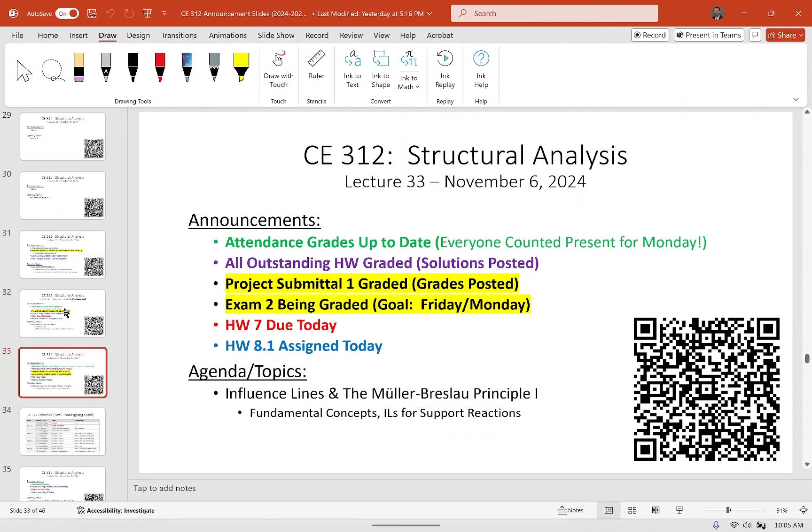I don't know if I showed you all this last time, so if I did, again my apologies. I'll pull the QR code up again, but I want to talk about this. This is our schedule until Thanksgiving break, okay?

Just a couple housekeeping items. So we're currently in week 12. What did we do last week? Last week we had the exam on Monday, we canceled class on Wednesday, and then we did our first MASTAN lecture on Friday, and then this was the pre-recorded lecture we did last time, okay?

So today we're starting our topic on the theory of influence lines. We're going to have 5 lectures on influence lines that go through how to construct them and then how to use them. And then we go through our last topic of the semester, which is matrix analysis.

The way matrix analysis is going to work is we're going to have 2 lectures in week 14, Monday and Wednesday. I'm going to assign a homework, it's going to be due after break, but not until Wednesday after break. So it's not going to be due on Monday when you return.

What we're going to do on Friday of Thanksgiving break is have a project troubleshooting day. Here's my point: if the project's done, you don't have to come, okay? I'm just going to be here in case you want to come and ask questions about the project. I'm not taking attendance that day, you can come or not, okay? The link to submit project submittal 2 is open on Blackboard, okay?

And for that submission, I need 3 things. I need the AutoCAD drawing of your final truss with all the members and all that — I have an example on Blackboard for what it should look like. I want your Excel calculations, or your calculations however you choose to do them, neatly formatted. Then I want your MASTAN file.

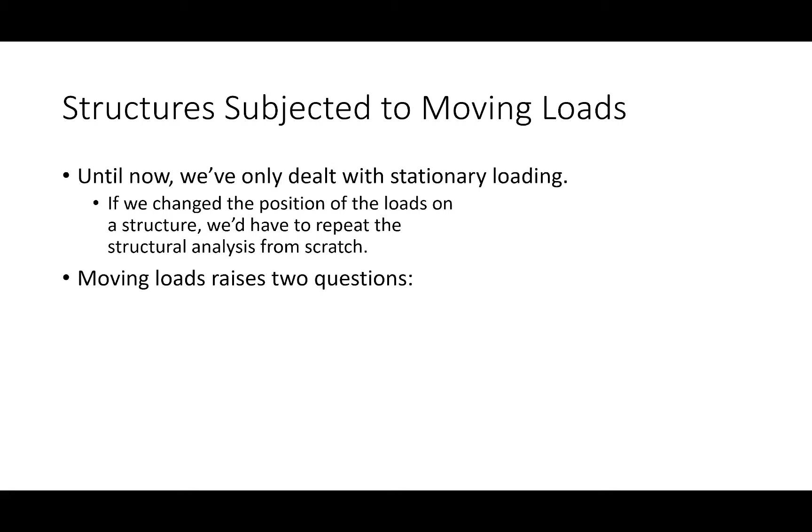Moving loads, or dealing with structures with moving loads, does raise two inquiries we kind of need to address. The first question is: is there a tool that we can develop to analyze a structure subjected to moving loads? And why would we want to do that?

A bridge, right? Bridges are structures with moving loads on them. The vehicular loads move across the structure. So we need to be able to handle not just a structural analysis due to loads at one position, but an analysis that results in an envelope of responses due to the loads at any position. Does that make sense, that idea?

So that's the first question. But then, okay, we have this tool—can we use this tool to do the structural analysis for us? In other words, can this tool tell us where to put the loads to generate the worst case scenario load placement? Can we get that answer directly with the influence line? And the answer is yes. That tool is called an influence line.

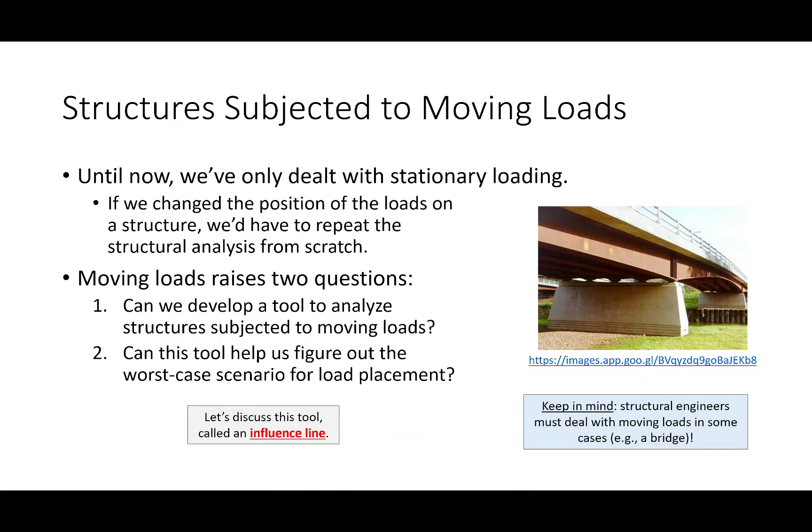I want to explain what an influence line is, and then we're going to go through several examples on how to construct one. So what is an influence line? No surprise there, it is a diagram used to assess a structure subjected to loads that move. So here's how it works.

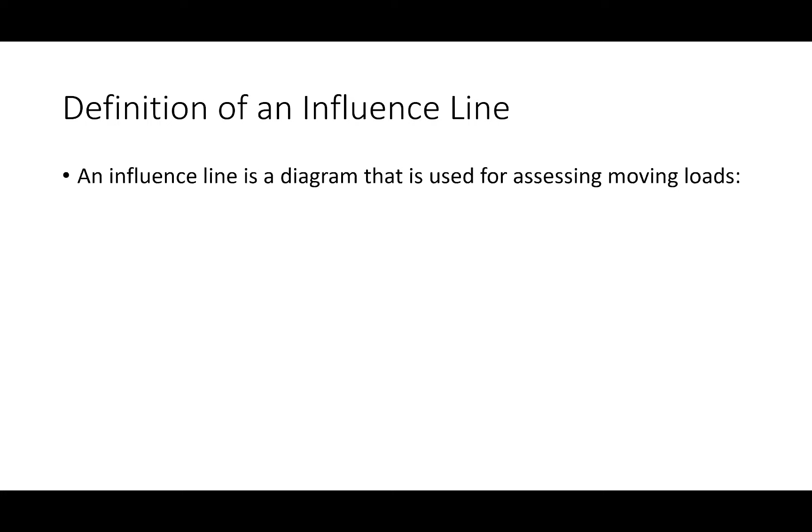What you do is you take your structure and pick a point on the structure that you're interested in. That point could be any number of things—it could be the reaction at A, it could be the shear right here, or the moment right here. For example, if I have a beam, I have a support here and a support here, I'm going to have a reaction there and a reaction there.

So I could say I'm going to draw an influence line for a response of interest. It could be this reaction, it could be this reaction, it could be what is the shear if I samurai sword right here, what is the moment if I samurai sword right there. So I have to pick a point of interest, okay?

And then what I do is take that structure and take a single unit load—we'll say a single unit load of 1. You can think of it as like 1 kip, but really it's just a unitless 1. We take it and move it across the structure, and as we move it across the structure, we keep our eye fixed on that response of interest, that point of interest, and record the response as the load moves. So on the x-axis we put the position of the load, and on the y-axis we put whatever response we're looking at. That plot is an influence line.

This basic definition, I want you to keep in the back of your head, because it will help serve as a gut check to ensure that what we're doing and the graphical approach we use still works, okay?

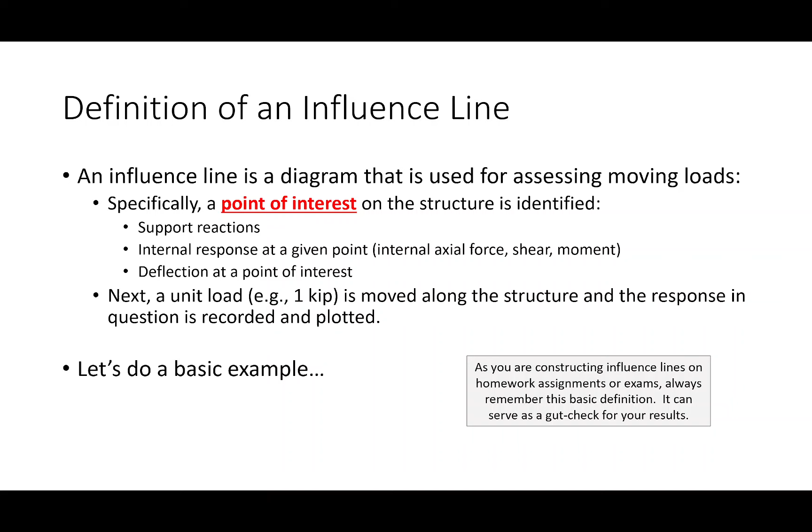So let's do a basic example. We're going to do this one on the board a little bit. I've got some of this on the slide, but let's do this on the board. Let me clean up what I've got here, and let's see if we can walk ourselves through this. This is the simplest influence line example that I can think of.

So I have a simply supported beam. We're going to say that this structure is 80 foot long. It's going to have a reaction here and a reaction here. It's also going to have a horizontal reaction, but for the purposes of influence lines, we're primarily dealing with vertical loads. That's one thing I'll mention about influence lines: we primarily deal with vertical loads because the application is for bridges. That's not to say you couldn't theoretically use an influence line for incline loads, but we're talking about traffic moving over a bridge. That's why we primarily discuss that.

We'll call this support A, we'll call this support B, and I want to figure out, let me draw a diagram, the influence line for AY. In other words, I want to figure out what the influence line for AY looks like as we move the load across the structure.

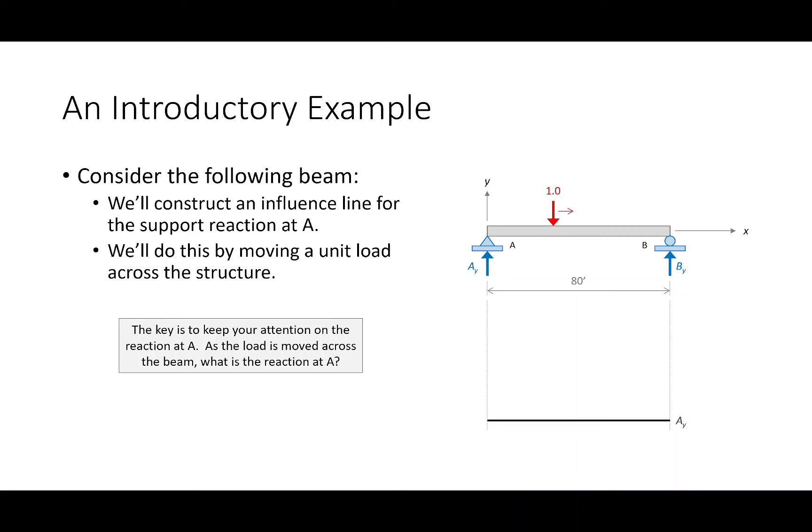Okay, let's do this. Now let's put the load right there. If I put the load there, what's the reaction at A? 1. So this is x equals 0 feet, 1.0, right? So that's going to look something like that. So I propose that the influence line for the reaction at A looks like that. Does that make sense? That's what we get.

So boom, you drew your first influence line. Congratulations. There is a lot packaged into an influence line. It is an incredibly deceptive but incredibly effective tool. It's deceptive how effective it is because it seems super basic. And it is, but what you can get out of this is amazing, and you're going to see this throughout the next few lectures. Let me explain a couple points.

For example, if I had a moving load and I was a geotechnical engineer responsible for designing the foundation under support A, where would I put those loads to generate the worst case response for design? I'd stick them over here, because this is where the highest value on the influence line is. With me so far? Okay, here's another application.

You told me that if I put the load right in the middle, the reaction is a half. Why is the reaction 1/2? I would say because the load is 1. What if I put a 14 kip load in the middle? What would the reaction be at A? 7. Now, how did you do that?

How about a way of doing that as 14 times a half? Here's my point: if you draw an influence line, which is the response due to a load of 1, you can determine the response due to any magnitude of load anywhere. You see what I mean? That's what I'm getting at.

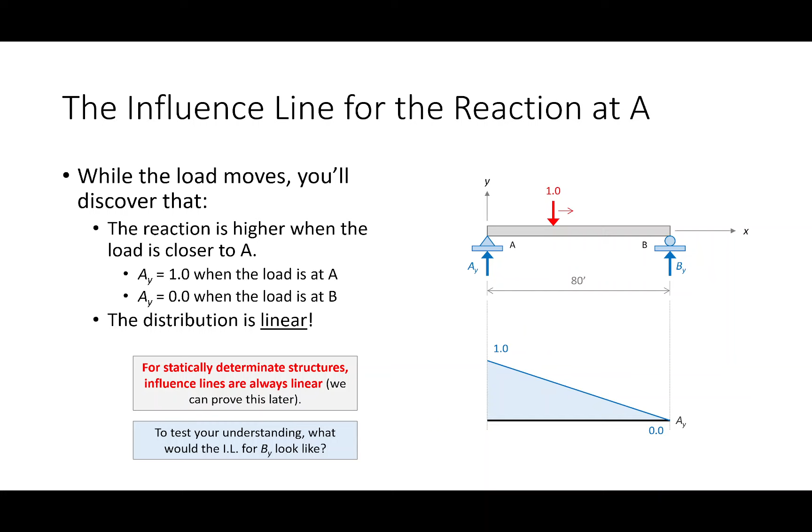Watch this. What is this plus this right here? 1. What about that? 1. 1, 1, 1. Why is that the case? I propose that happens if you draw the influence lines for every reaction in a structure and superimpose them. That will always happen. Why? Because the sum of the forces in the y direction equals 0. I have a 1 going down, so I have to have 1 going up. Does that make sense? There's a lot baked into this. So far, so good?

Okay, now a couple things. This is a fine way of learning how to understand influence lines, but it is really tedious. Remember when we were doing shear and moment diagrams and we said we could just cut sections and plot it, and that would be a pain? We said let's not do that, let's develop a graphical approach, develop some patterns, and then we can draw shear and moment diagrams more effectively. Well, we're going to do that here as well.

Influence lines: so a couple things. Influence lines for statically determinate structures are always linear, always. You're going to understand why here in a bit. For indeterminate structures, that might not be the case, and again you'll understand why here in a bit.

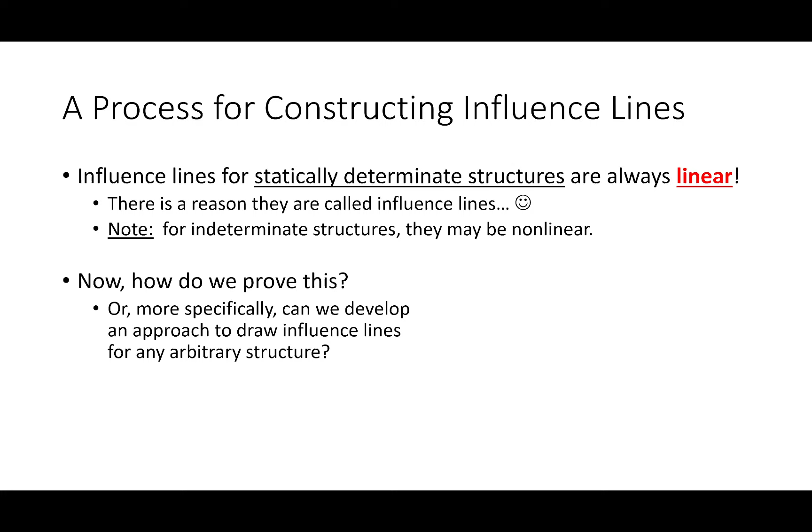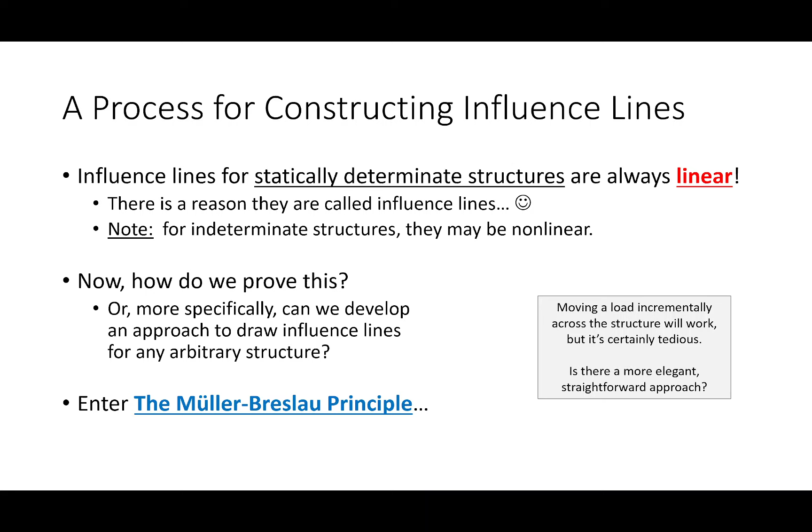Now, how do we prove this? Or maybe, how do we develop this approach to generate arbitrary influence lines? Is there a more straightforward approach? The answer is yes, and the name for this approach is called the Müller-Breslau principle. Now, the Müller-Breslau principle is a mouthful, but once you work it through in your head, you'll see how easy this is. If you were to define the Müller-Breslau principle, this is what it says: the deflected shape of a structure represents, to some scale, the influence line.

Specifically, the influence line for a given force effect, if you take that force effect and move it through a small displacement. I am sure, given that everybody's thinking about non-Newtonian fluids right now, you're going, what? That was a lot. What are you talking about, Dr. Mike? So I'm going to distill this for you in an easy to digest, step by step way.

So here's how an influence line works, and this is how the Müller-Breslau principle works. The first thing you do is, just like over here, you identify a response of interest. What are you drawing the influence line for? Let's say we are drawing the influence line for the reaction at A. Then we take that support reaction and kick it away, we get rid of it. Then we take that structure and move it through a unit displacement, and the resulting deformation is the influence line.

Let me walk it through over here. Okay, can I erase some of this? Okay.

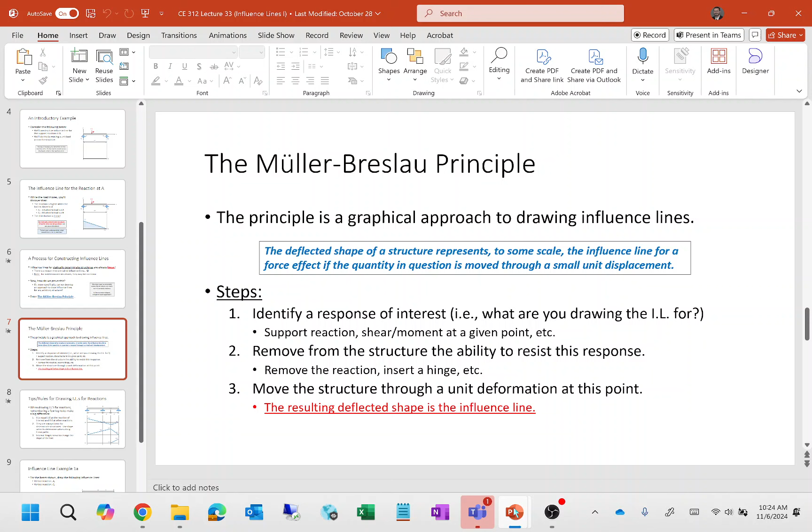So what I'm then going to do is I'm going to pick this point on the structure and move it up, so much so that that displacement is 1. Now if I pick the structure up and move it up 1, what does that look like? Well, it looks like this. So here's the structure, and if I pick that point and move it up, that's what it looks like, right? It just whoop, goes up, right?

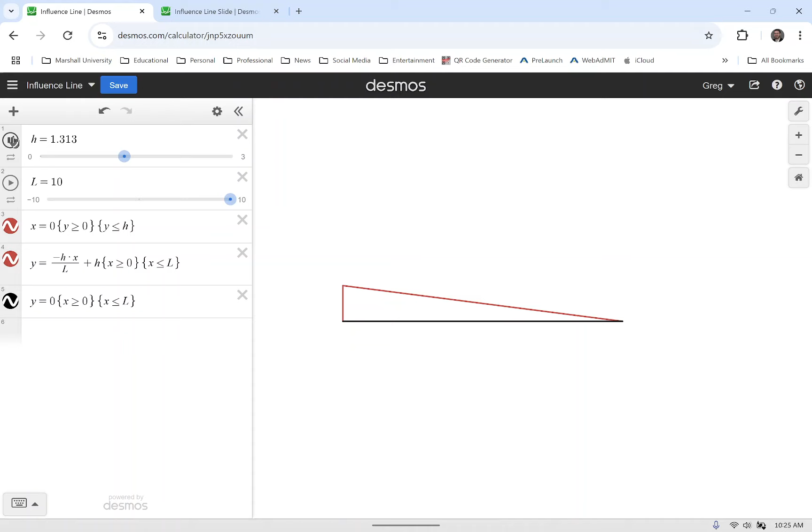Isn't that resulting displaced shape the influence line? Isn't that what it looked like? That's what the Müller-Breslau principle states, and that's the graphical approach that we're going to use, that we just pick the structure up and we deform it. Okay, with me so far?

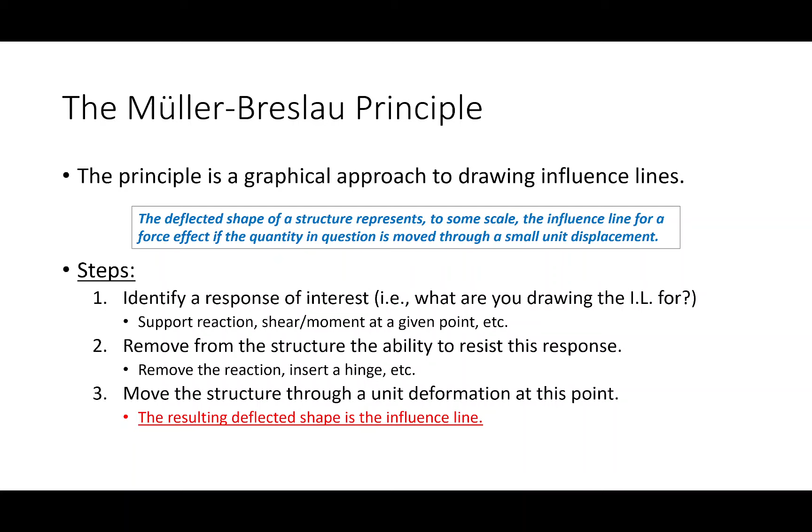We can do this for some really interesting and complicated structures. Okay, so let's take a look at what I've got here on the slide, because I'm gonna go back and show you these here in a bit. But now I have an influence line situation that's a little bit more involved.

Okay, so let's say I'm trying to draw the influence line for the reaction at A. Okay, so let's just take what we know about structural behavior and let's make some common sense observations.

If I put the load at A, what is the reaction at A? The load, which is, in this case, the load is 1, right? So I'm saying that right here, that needs to be 1. Are we okay with that?

If I take the load and put it at B, what is the reaction at A? No, hold on, it's 0, right? If you put the load right here at B, the reaction at B is 1. Here it's 0, right? So this should be

0. What about if I put the load at C? Still 0. In fact, would a general statement about reaction influence lines be that influence lines for reactions should equal 1 at that reaction and 0 at all other reactions? Right? Is that just common sense? Does that make sense? Okay.

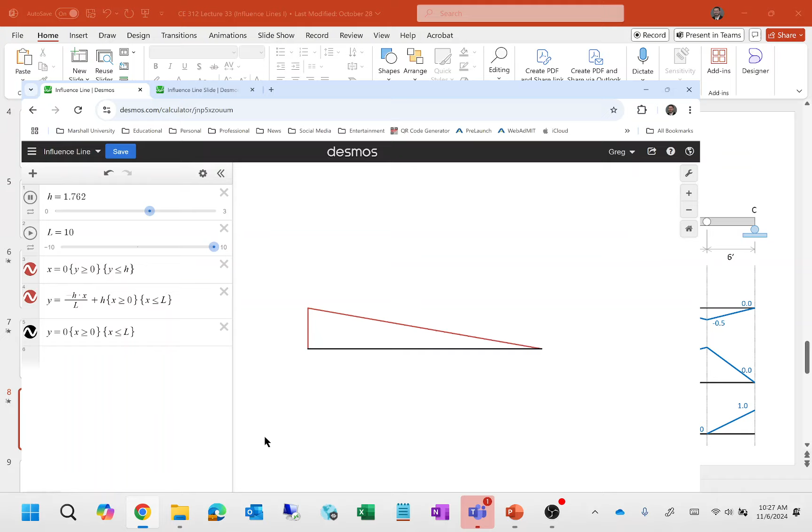You stop. So here's that structure. I don't know how easy that's being visible, but here I've got support A, support B, support C. Okay, if I take support A and lift it up 1, so here's what I'm doing for this structure. Okay, so let's draw this structure out. Okay, so here's the structure.

All right, so I have a support here, support here, support here, and then I have a hinge right there. Okay, there's a hinge right there. What I'm doing is I am removing that support and I'm picking this up 1, right? But I'm not getting rid of this support and I'm not getting rid of this support. So I'm sort of saying the structure from here to

here is going to behave like a seesaw, right? And then this hinge, it's going to do that. So if I look at the structure as it deforms, it does something that's kind of like this, right? The hinge right here is where it sort of like changes direction and it pivots about where the supports are, right? Not only does that make sense kinematically, but it makes sense from a structural response standpoint, right?

The influence line has got to equal 1 here, 0 here, 0 here. And it also has to be linear. The influence lines are lines. Make sense? This is the only way that those facts can be satisfied. Okay, so far so good?

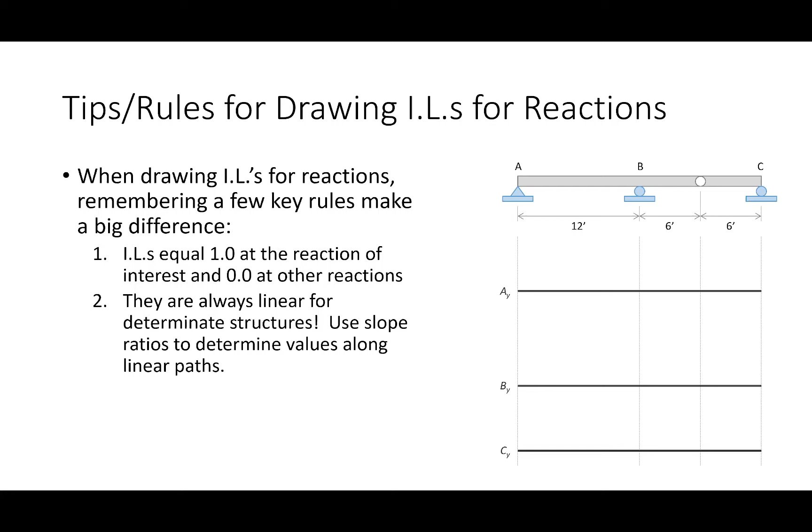Influence lines equal 1 at the reaction of interest and 0 at all other reactions. They're always linear for determinate structures, and internal hinges change the direction or slope of the line.

So this is what the influence lines look like for this structure. Let's take, for example, the influence line at B. It's 0 at A, 1 at B, 0 at C. So what would we do for the influence line for the reaction at B?

Here's the structure. Get rid of that support and then pick this point up. Well, think about this, this is a hinge. In order to pick this up, this has got to go up, and then that's got to go back down. Does that make sense? Go with me on that?

So how do I get the numbers? Well, the numbers are just slope ratios. Like if I look at AY, I've got 1 in 12. So how far do I go in 6? A half, or negative a half. Same thing here with BY. I go 1 in 12, so in 18, I go 1 and a half.

And as for CY, the deal with CY is I have a roller here, so this is the original structure, and I'm getting rid of this and picking this point up. Well, the only way that happens is just to pick that little bit up, right?

And what do we have? This plus this is 1. This plus this is 1. Negative a half plus 1 and a half plus 0 is 1. That plus that is 1. Does that make sense?

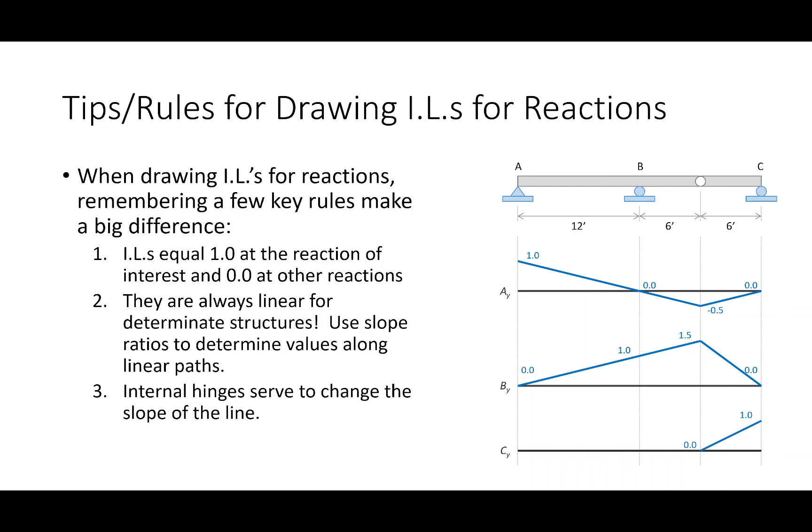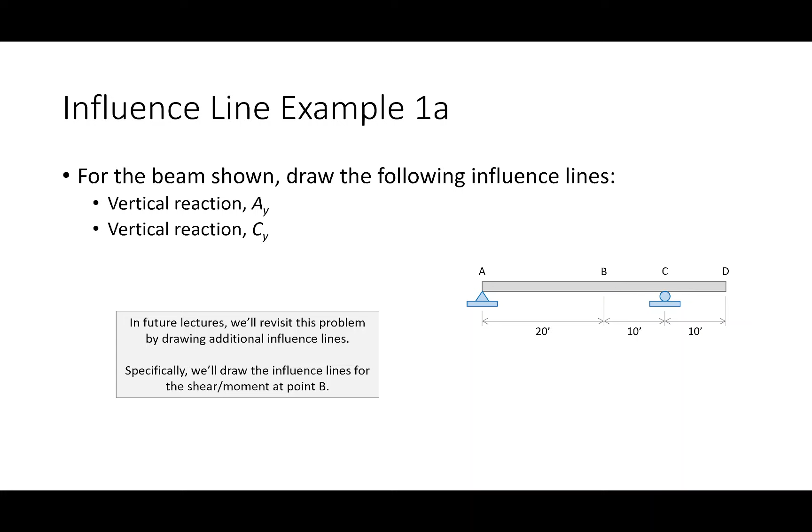You want to do some practice? Let's do some practice. Before we get into the notebook, I want to show you what I've got in these slides. I've got influence line example 1A, and influence line example 2A. I've got two different structures, and the reason I'm calling them 1A and 2A is because next time we're going to go back to these structures and look at them again. For example, for 2A, we're going to draw the influence line for each of the vertical reactions.

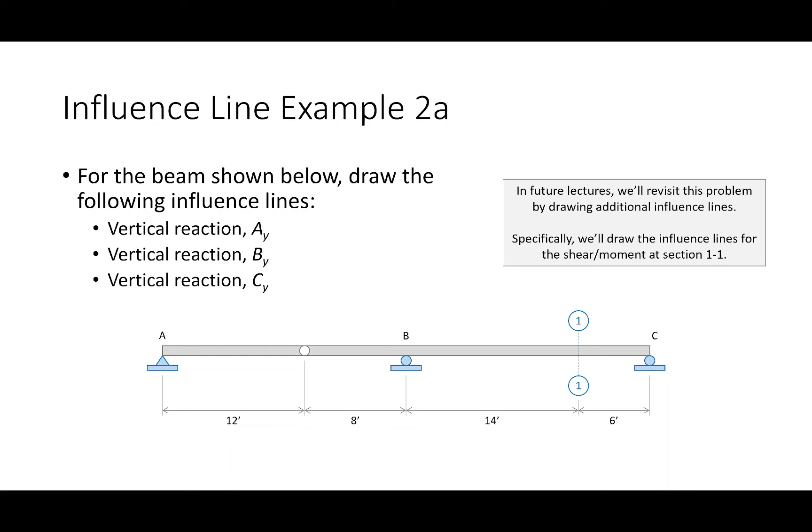There's this section here, we're going to ignore that. Not that we're going to totally ignore it, because we're going to come back next time and redo it. I'm just saying, for this time, this isn't going to matter. So far, so good? All right.

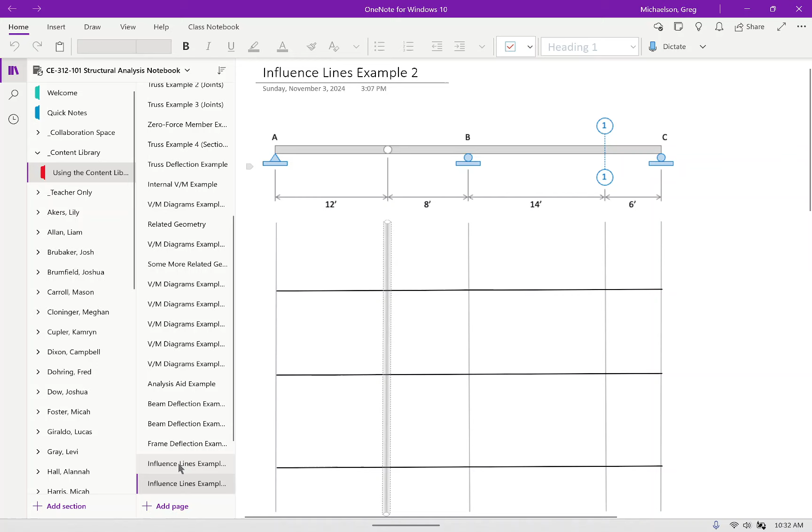All right, so let me pull up the notebook here. So here's my diagram that I drew, and I have the influence lines right here. So I drew these sort of vertical lines to give myself a guideline to go for. And then I've got two spaces where I'm actually going to draw the influence lines. So again, all we're doing now is influence lines for reactions.

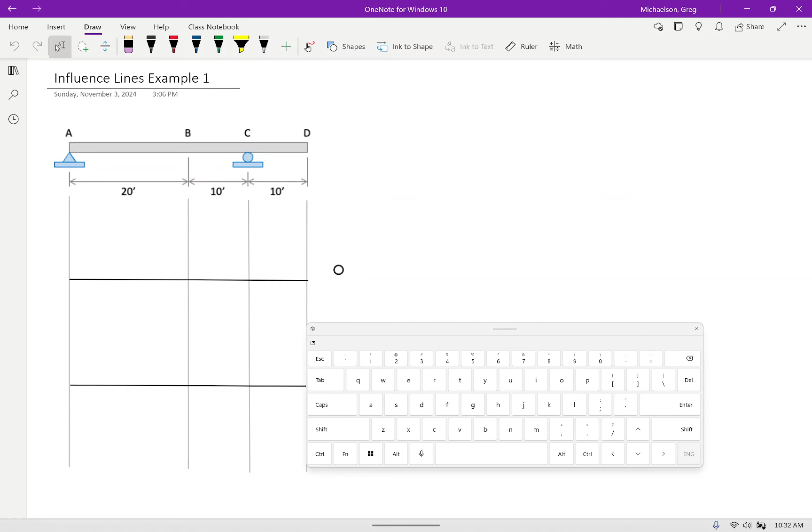So we're going to have the influence line for AY and the influence line for CY. Let's see if we can work through this.

For AY, what's the value here? 1, right? What's the value here? 0, 0. Okay, now let me ask this question. How many total physical pieces are there on this structure? It's just one solid beam from A to D, right? So I propose the influence line is going to be one solid line.

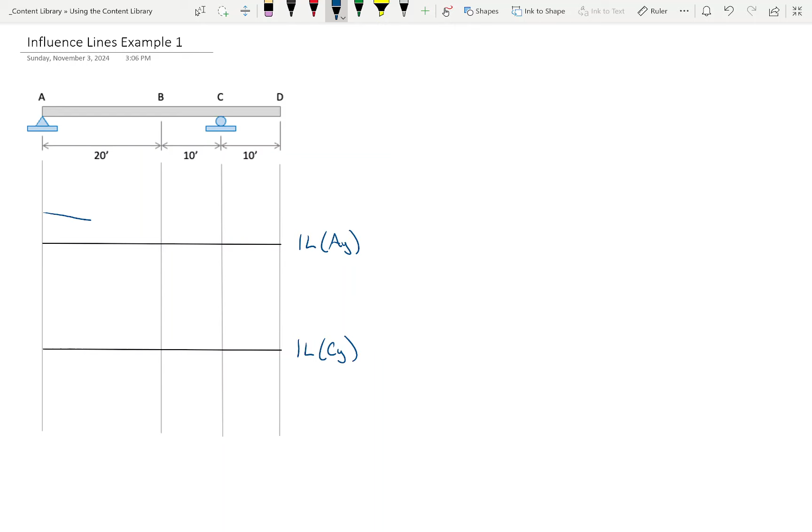Because if I take the roller at A, or the support at A, remove it, pick it up one, it's going to be like a seesaw where this is the fulcrum of the seesaw, right? So the influence line for the reaction at A is going to look like that.

This is 0. This is 1. By the way, what is, I'll do this in another color, what's that value? Wait, tell me what that value is. 0.3? Well, is it 0.3 or more, like in a fraction? 1/3, yeah, 0.3 repeating.

What about that point? Negative 1/3. Do I need to go through the math on that, or is everybody able to just observe that based on the linear pattern, that's 1/3 and negative 1/3? Okay, I did AY.

I want somebody in here to tell me what CY looks like. I'm not telling you, you tell me. 0 at A, 1 at C. So what you're saying is it's just going to, boom. You're 100% right.

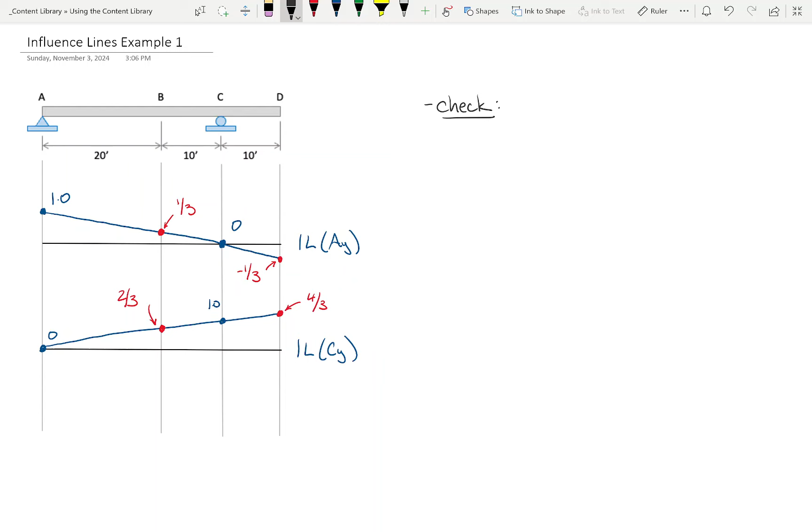Let's consider the load at D, okay? So what I'm saying is, let's just put the load right there. And let's just ignore all this influence line hullabaloo. Let's just treat this like this was a problem in the wonderful world of structural analysis.

So this dimension right here, what is this dimension? This is 30 feet, right? And that's 10 feet. Is that right? Okay. So this is A. This is C. So what?

All right, so let's sum moments at A. So what do I have? 1 times 40, right? And so I've got to have something times 30. So we'll say that CY, what was I doing? We'll put CY like that. So we'll say, was that 1 times 40 feet? Like that. So we'll get CY is 4/3 going up.

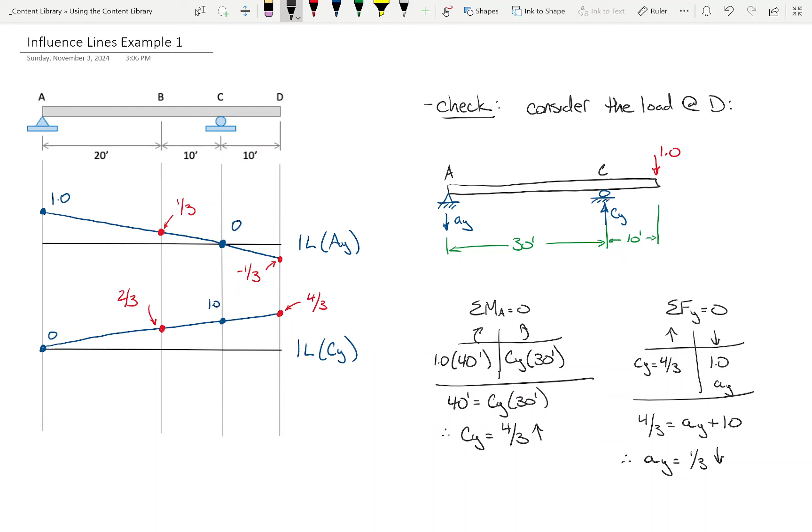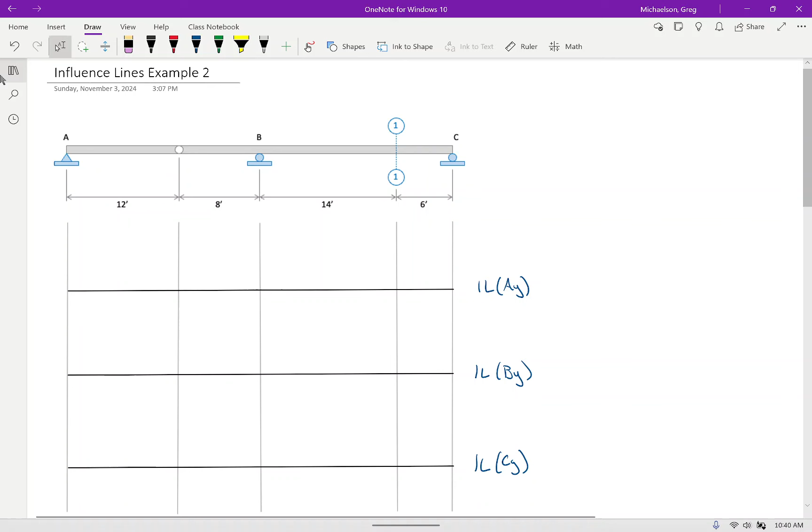And by the way, I am very sorry, but I forgot something I wanted to point out on the last problem. What is this plus this? This plus this? This plus this? That plus that? It's still 1, right? So, okay, sorry, I couldn't help myself.

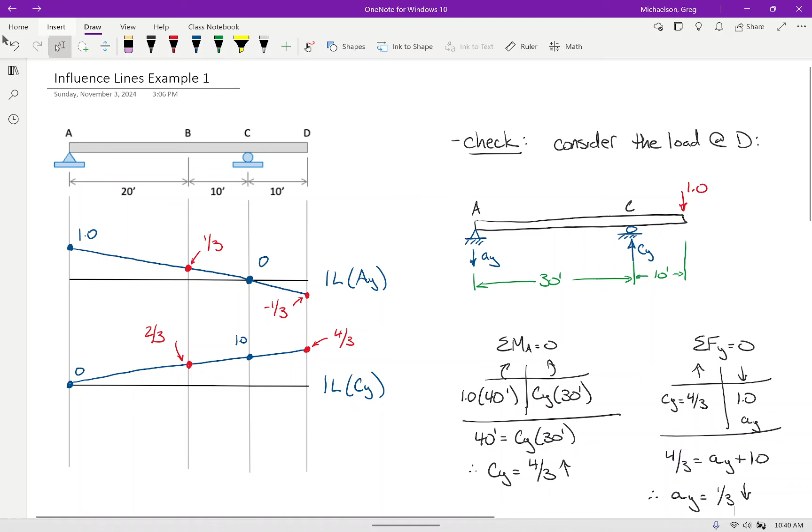Okay. All right, let's see what we can see here. So let's take it one at a time. Let's start with AY. What is the value right here? 1, 0, 0, right? Okay.

Now, I want y'all to look at this structure. I want you to think real long and hard about what the influence line looks like. And just to give us something to look at, we'll call this point D. And if you want, we can call this point E, although I'll probably just call it a section later. But, okay, the big thing I want you to recognize is that there's a hinge at D.

That's a hinge, okay? So I want you to think long and hard and tell me, can somebody describe to me what they think the influence line for AY is going to look like? It goes from 1 to 0, from A to the hinge, and then 0 the rest of the way across. You are 100% correct, that's what it looks like. Because, see, B and C are still pinning it down. Think of B and C as like little clamps fixing that thing down. That's the influence line. That's it.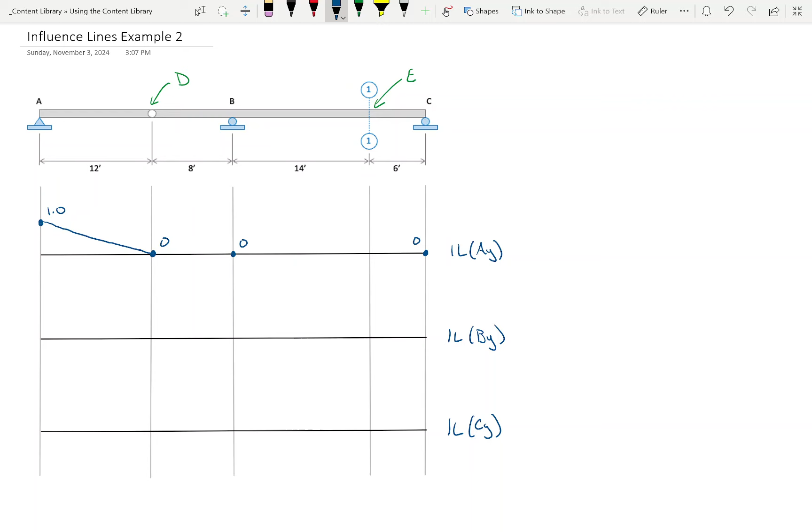What's the reaction at A if I put all these loads on the beam? 0, right? No load on this side of the hinge is going to cause a reaction at A. Because that's what this says, right? You never would have thought about that before, would you? See what I mean? So, again, influence lines are really powerful. You could do a lot of damage with them.

And you could start to see how one of the applications of influence lines is just going to be to do the structural analysis. Just do it with these. Okay, all right, let's do BY. Let's see what we can see.

All right, so what's it going to be at A? And at C, and at B. Okay.

So I'm getting rid of this hinge, I'm getting rid of this support, and I am lifting it up. But it's still pinned right here. So think, it's pinned right here. I'm lifting this up. It's got to be straight lines, and I've got a hinge right here. Somebody tell me what the deformed shape looks like.

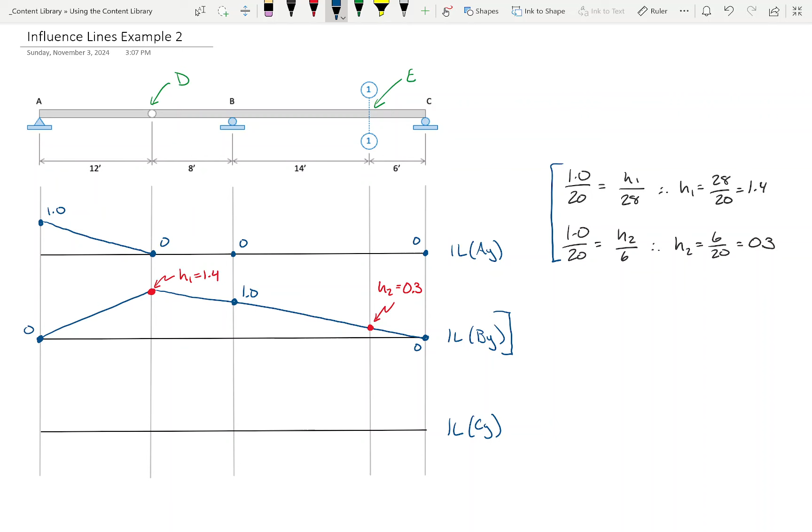Does that make sense? Okay. That's not too bad, right? So maybe what I'll do is sort of move that down a little bit so you can see where that's coming from.

Now, does anybody have a little cheat code on maybe how we can get the influence line for the reaction at C? Will you say it again? Exactly. It's got to add up to 1, right? So what does this value have to be?

0. Now there's two ways of figuring that out. One, it's a support other than C, but 1 plus that plus, it's got to be 0, right? Okay, so let's just go ahead and say this is 0. This has got to be negative 0.4, right? This has got to be 0, and over on the right, it's got to be 1, right?

So what's got to happen is it's got to go down, then through like that, right? And that's kind of what it's got to do, right? Because the hinge is going to change the direction, but it's still pinned here and pinned here. So it's going to... ooh.

So this is 1, 0, and then we have a point here and here that we have to figure out. But again, we don't really need to do any figuring out because we know that, and that, because it's got to sum up to be 1. That has to be negative 0.4, and that has to be 0.7. Okay?